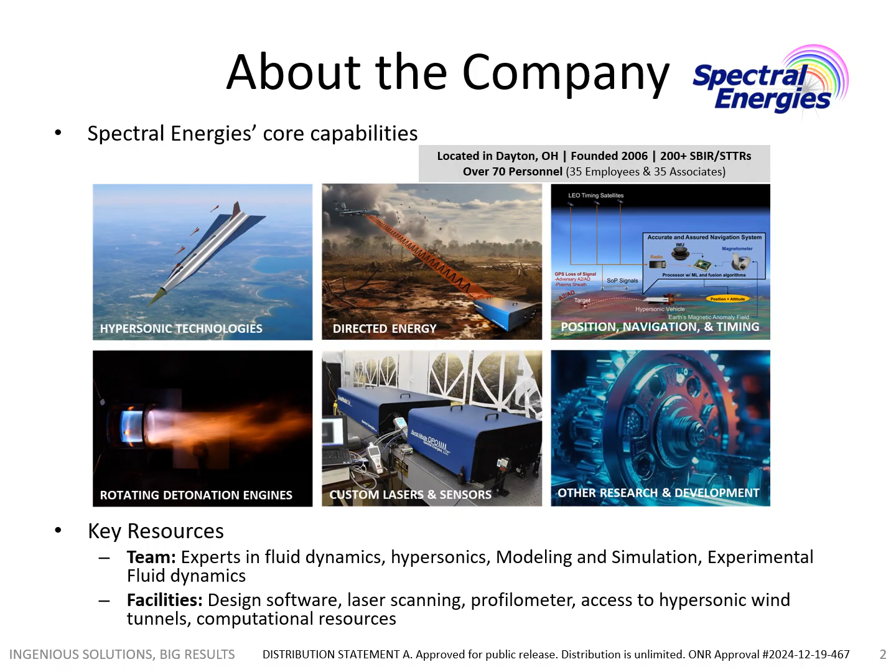Our project is funded via the Navy SBIR topic N68335-24-C-0133, titled Investigate the Use of Discrete Patterned Roughness for Turbulent Transition Control in a Hypersonic Boundary Layer.

The primary objective of this research is to model, investigate, and understand the influence of rough surface conditions resulting from manufacturing processes, as well as wear and ablation during hypersonic flight, on turbulent transition. A secondary goal is to utilize discrete surface roughness patterns to control or delay this turbulent transition, ultimately achieving drag reduction and minimizing surface heating.

The focus of this study is particularly relevant for hypersonic applications, especially in the context of weapon systems. There is a growing recognition that discrete patterned roughness has shown promise in suppressing boundary layer transition on hydrodynamically smooth hypersonic lift-generating configurations affected by crossflow. However, actual vehicles often exhibit roughness from various sources, including manufacturing imperfections and material degradation over time.

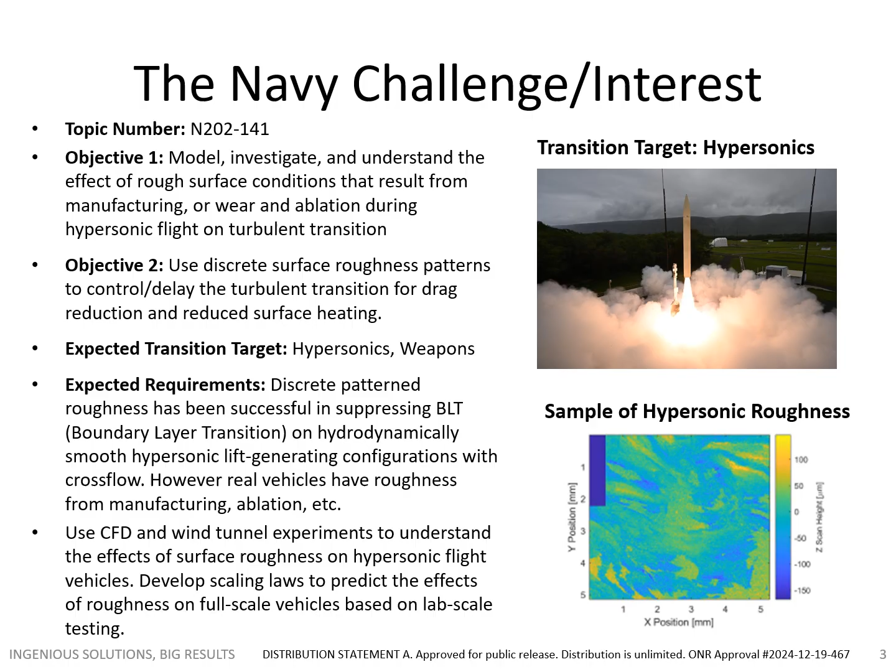To comprehensively understand the effects of surface roughness on hypersonic flight vehicles, the research will employ computational fluid dynamics and wind tunnel experiments. Additionally, scaling laws will be developed to predict the implications of surface roughness on full-scale vehicles based on insights gained from lab-scale testing.

Understanding the impact of surface roughness from manufacturing and ablation processes on the flow over hypersonic vehicles is critical. There is potential to design patterned surface roughness to control and delay boundary layer transition, which could significantly influence performance. Notably, introducing surface roughness might delay the transition to turbulent flow, resulting in drag reductions of up to 20%. Such reductions could, in turn, enhance the range of hypersonic vehicles by approximately 11%.

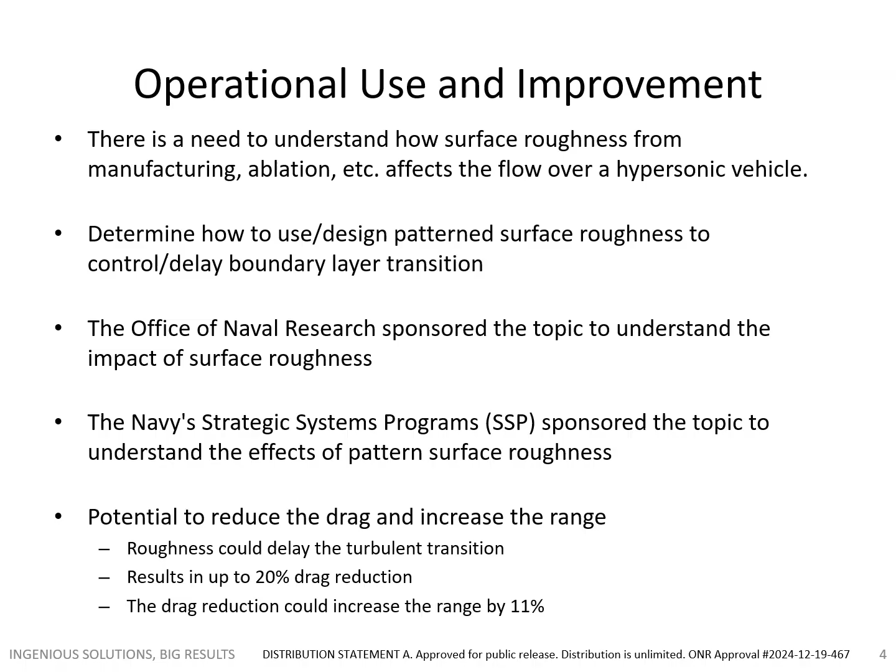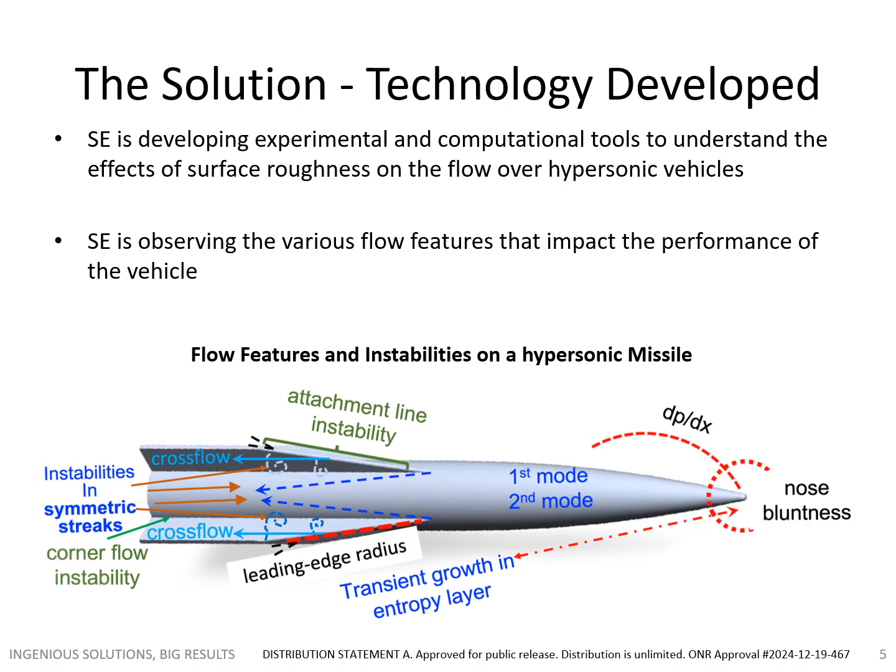SE is currently focused on developing both experimental and computational tools to better understand how surface roughness affects airflow over hypersonic vehicles. The research involves observing various flow features that play a crucial role in influencing the overall performance of these vehicles. Through this work, SE aims to gain deeper insights into the complex interactions between the vehicle's surface characteristics and the aerodynamic forces at play during hypersonic flight.

The SE team has conducted simulations of realistic roughness conditions, drawing insights from 1950s flight test articles to identify critical instability modes. We developed patterned roughness aimed at mitigating the most unstable modes, with initial simulations and experiments indicating promise in delaying turbulent transition. Moving forward, the team plans to select a more relevant flight vehicle and investigate the natural roughness patterns to evaluate their effects.

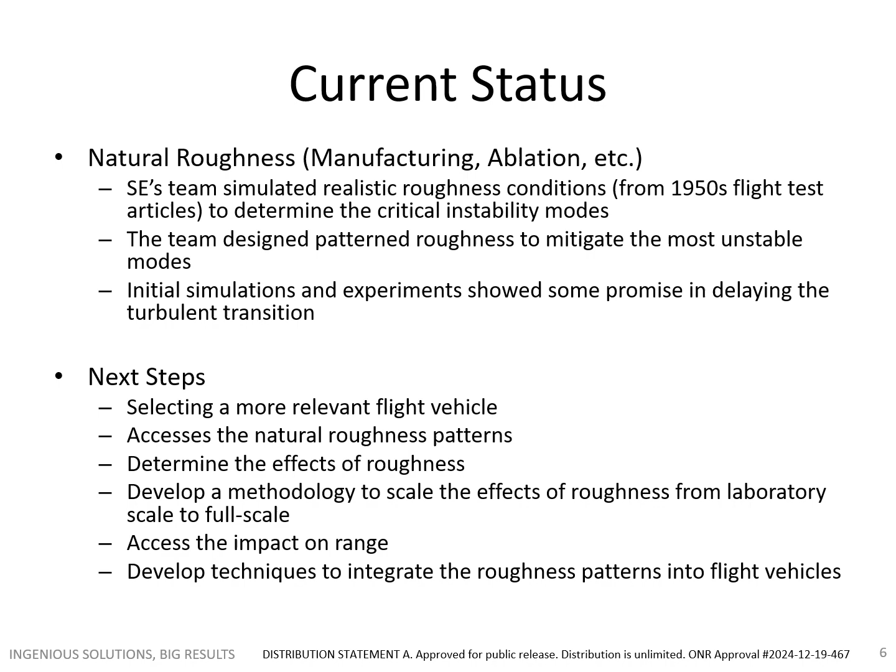Additionally, we will develop a methodology for scaling the effects of roughness from laboratory conditions to full-scale applications and assess its impact on range. Finally, the team aims to create techniques for integrating these roughness patterns into flight vehicles.

Our product will offer many benefits to the Navy and DoD. Three major benefits of our work include increased range, reduced testing costs, and better physical understanding of hypersonic boundary layer transition.

Delaying or eliminating turbulent boundary layer transition can significantly reduce drag by up to 20%, potentially leading to an 11% increase in the range of flight vehicles.

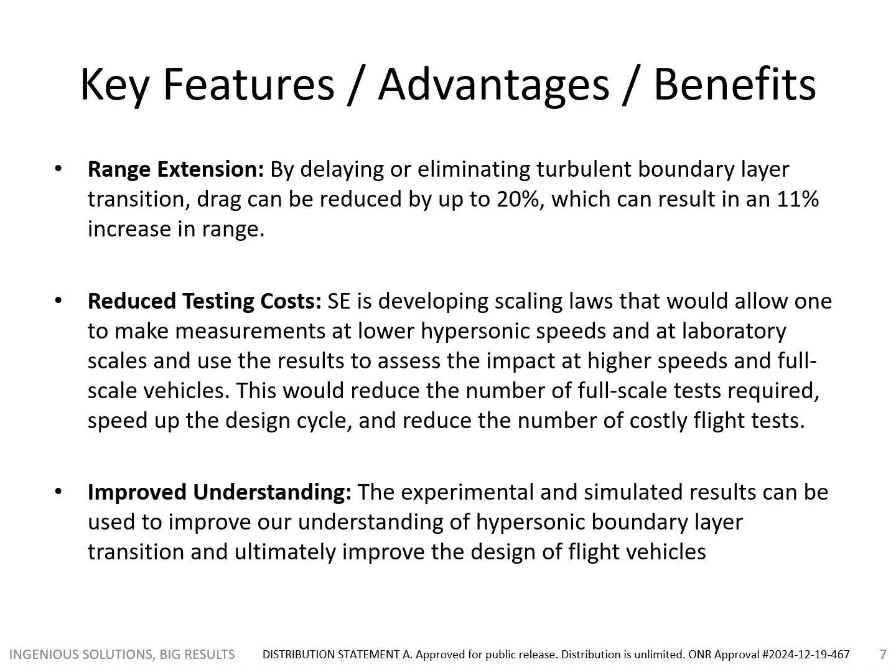Additionally, SE is working on developing scaling laws that enable measurements at lower hypersonic speeds and laboratory scales to be related to impacts at higher speeds and on full-scale vehicles. This advancement aims to decrease the number of full-scale tests required, streamline the design cycle, and lower the costs associated with flight testing. Furthermore, both experimental and simulated results will enhance our understanding of hypersonic boundary layer transition, ultimately contributing to improved flight vehicle design.

SE is working on a comprehensive transition plan focused on enhancing modeling and experimental capabilities. This includes obtaining realistic geometries and roughness patterns, as well as identifying essential partners in the field, such as prime contractors involved in hypersonics. The plan involves integrating these roughness patterns into hypersonic flight test vehicles and demonstrating the benefits, ensuring that any drag reduction achieved surpasses the additional weight and complexity introduced.

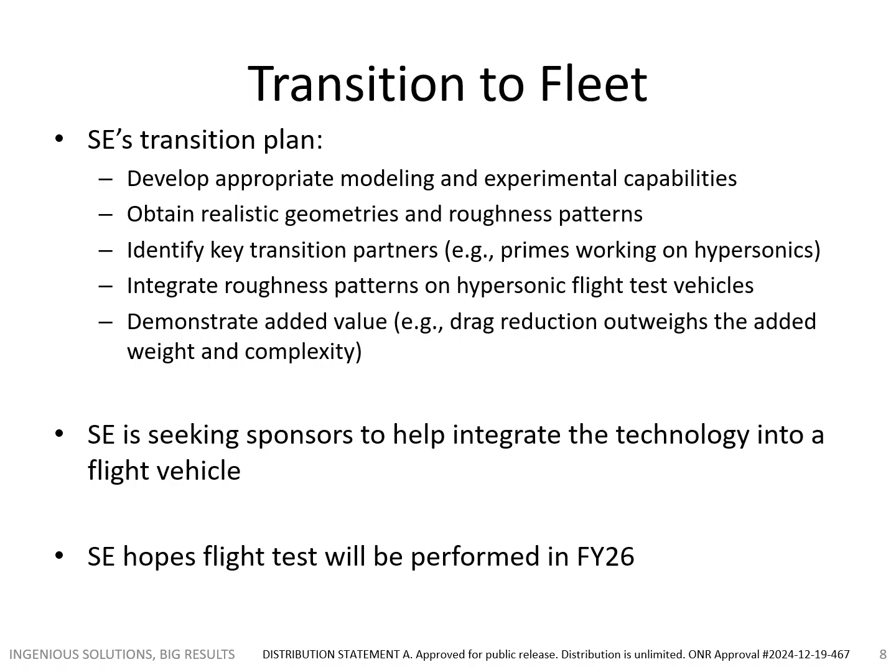Additionally, SE is actively seeking sponsors to support the integration of this innovative technology into a flight vehicle. The goal is to conduct flight tests by fiscal year 2026, marking a significant step in advancing hypersonic research and development.

SE's product will fit into a few markets. The most obvious market is the hypersonic defense market. Organizations in this field are focused on developing next-generation hypersonic systems to stay ahead of our near peers. This technology could be applied to both future reusable systems as well as missile systems. Extending the range of either of these systems may be crucial.

In addition, some organizations are already looking into developing commercial hypersonic transport vehicles. Our technology could help them develop aircraft with lower operational costs.